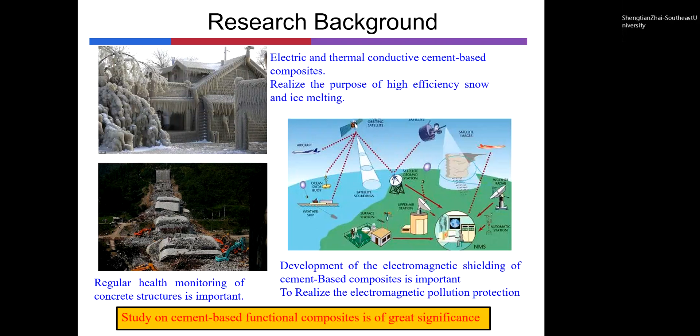And the development of the electromagnetic shielding performance of cement-based composites is important, which can protect humans from electromagnetic radiation. Therefore, study on cement-based functional composites is of great significance.

Graphene, as a two-dimensional material with excellent comprehensive properties, has become a research hotspot. Tensile strength is 130 GPa. Elastic modulus is 1 TPa. Thickness is only 0.34 nanometer.

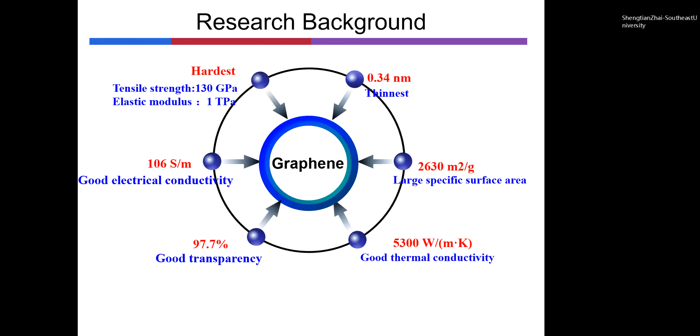As we know, graphene has many advantages, and then how do these properties affect cement-based materials, such as physical and chemical interaction with the cement matrix, compressive and flexural strengths, pore structure and hydration process?

However, the dispersion and the stability of graphene in the cement matrix are poor. Dispersion of graphene in aqueous systems and preparation of high-concentration, stable graphene dispersions are the key factors for the development of graphene cement composites.

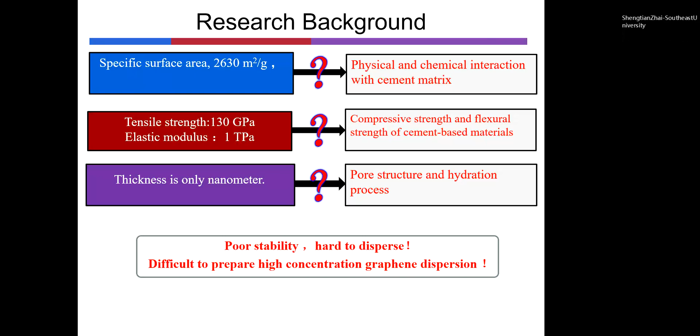Therefore, different dispersants and different ultrasonic methods were used to prepare the graphene dispersions in this study. Finally, the best dispersant and the most suitable ultrasonic method were determined. Next, please look at part 2.

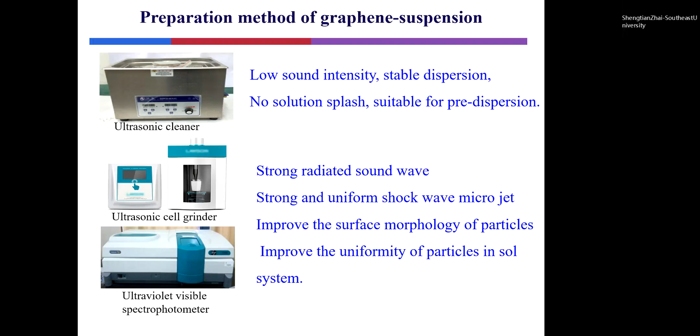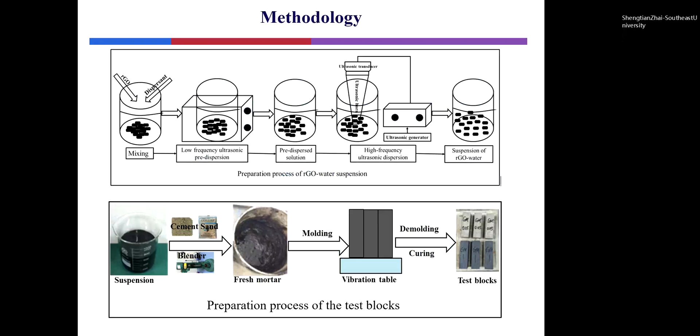The ultrasonic cleaning instrument has a low sound intensity, stable dispersion, and no solution splash, so it is suitable for the pre-dispersion equipment. The ultrasonic probe renders a stronger radiated sound wave at the end of the probe, so a strong and uniform shock wave and micro jet are formed in the reaction liquid. This picture shows the preparation process of the graphene suspension and the test samples.

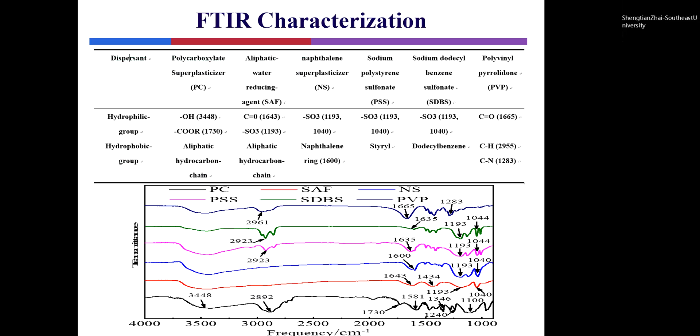Next, please look at part 3. This picture shows the functional groups of the dispersants. We can see that these dispersants have both hydrophilic groups and hydrophobic groups. This picture shows the absorbance of graphene in different dispersants. We can see that the absorbance of the NS is the largest. According to the Lambert Beer law, NS has the best dispersing ability.

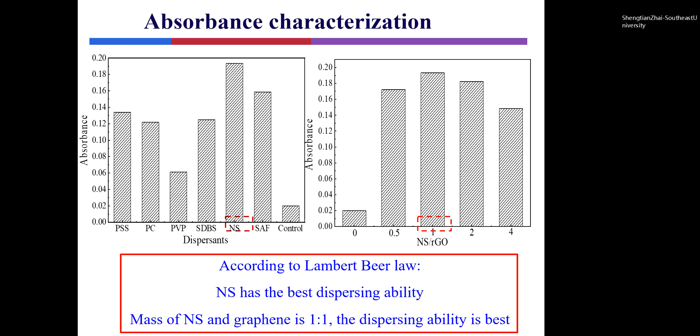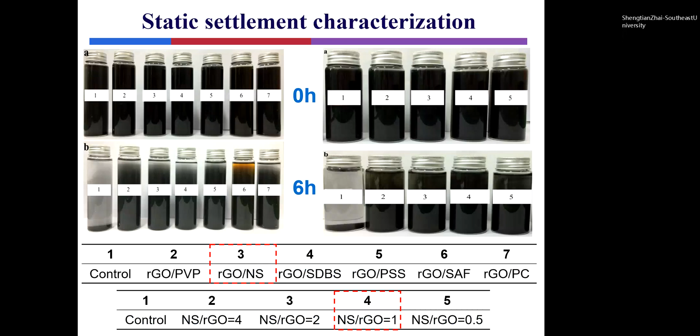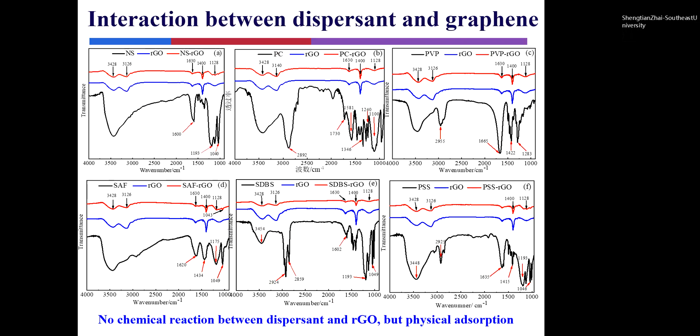This picture shows the state of the NS graphene suspension with different concentrations after static settling for 6 hours. This picture shows the FTIR analysis result of the dispersants, graphene and the suspension. From this picture, we can see that there's no chemical reaction between the graphene and the dispersant, just physical adsorption. According to the experimental result, the summary is as follows.

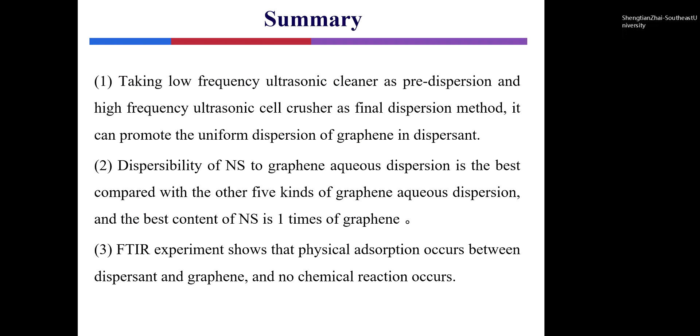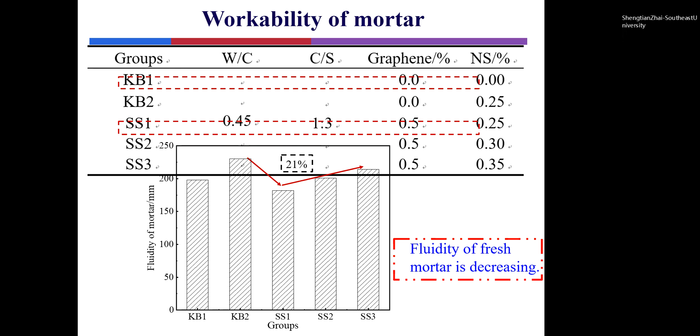Next, please look at part 4. This picture shows the fluidity of fresh mortar. The result shows that the fluidity of the mortar decreases with the addition of graphene. This is mainly due to the large specific surface area of graphene, which absorbs a lot of water.

This picture shows the mechanical properties of the mortar with different graphene contents at 3, 7 and 28 days. We can see that the compressive and flexural strengths show a first increasing and then decreasing tendency with the increase of the graphene content. In addition, the effect of the graphene content at early ages is the most significant.

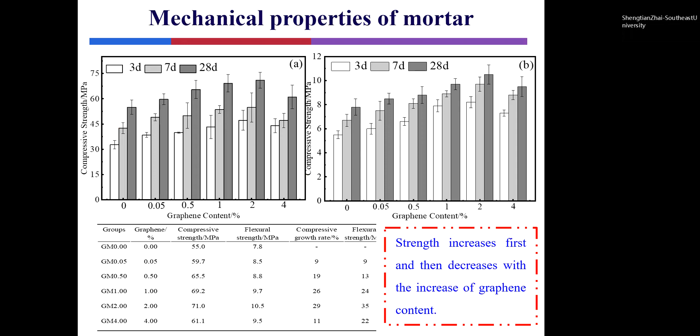Next is part 4. This picture shows the hydration exothermic curves of the mortar with different graphene contents. The result demonstrated that the exothermic rate of the sample gradually increased with the increase of the graphene content. The peak value was the largest when the graphene content was 4 weight percent, and 2 weight percent was lower. However, there is no obvious difference in hydration rate when the cement hydration entered the stable stage.

This is mainly due to the nucleation effect of graphene, which increased the contact area between the cement and water when graphene particles adsorb on the surface of cement.

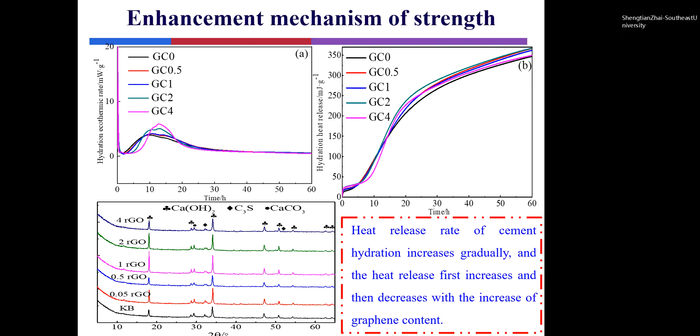This picture shows the pore size and distribution in the hydrated cement matrix. The porosity of the hardened mixture was significantly reduced with the introduction of graphene. When the content of graphene was 2 weight percent, the porosity was decreased by 31% compared with the standard sample.

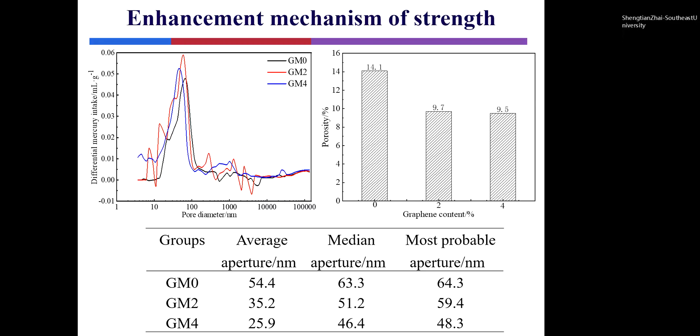This picture shows that the small-size pores increased first and then decreased, and the large-size pores were basically the same. This result illustrated that the graphene particles filled the large pores of the cement to form a plugging effect, and the number of small pores increased within this range of graphene content.

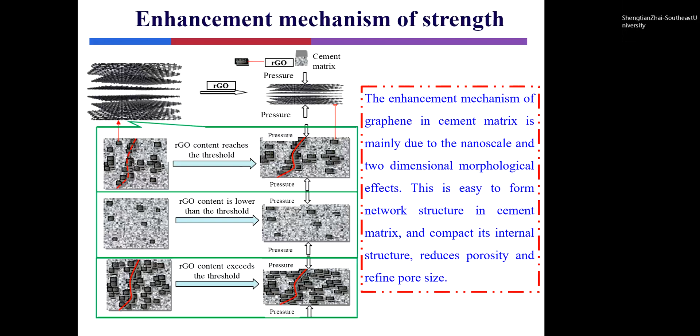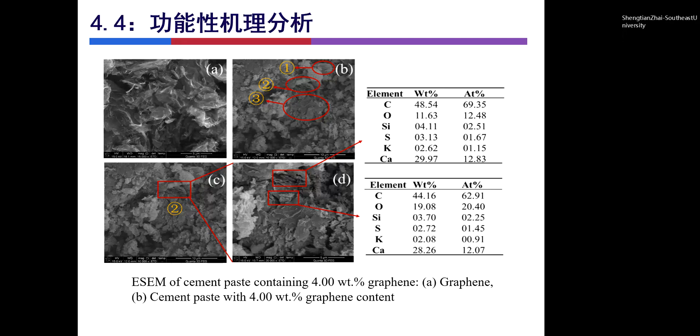This picture shows ESEM of graphene cement-based materials. To better understand the mechanism of graphene improving the strengths of cement-based materials, we measured the ESEM of graphene and cement-based material with 4% graphene. A lot of graphene laminar structures are distributed in the hydration products of the cement, which not only fill the pores, but also make the structure of the hydration products denser. According to the experimental result, the summary is as follows.

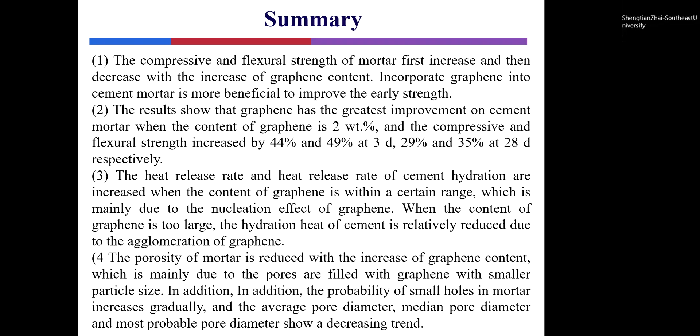Next is the last part, conclusion. This is all my conclusion.